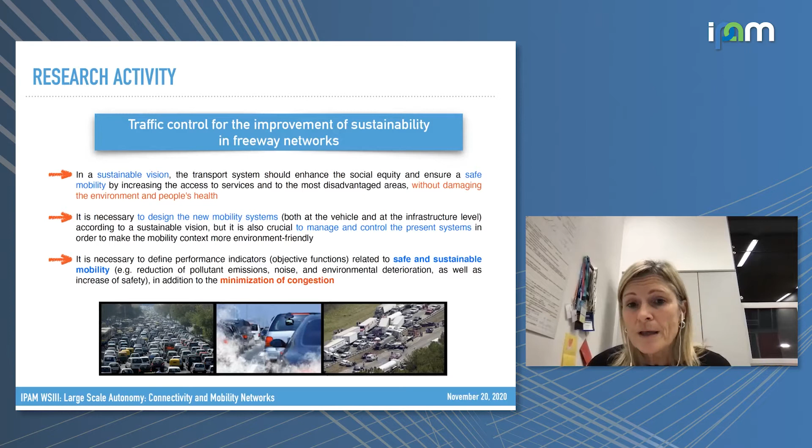First of all, we have been working a lot about freeway networks, so we are dealing with road transportation and freeways. The main objective of our research activity has been for long the possibility of improving sustainability. We would like to tackle traffic control in a sustainable vision, in the sense that we do not only want to reduce congestion, which is a typical objective function in working with freeway traffic, but we also want to take care of other performance indicators related to safe and sustainable mobility.

We have worked a lot defining and using performance indicators such as pollutant emissions, noise reduction, environmental impact, as well as safety, always together with the minimization of congestion phenomena. The main ingredients for a freeway traffic control scheme are here presented. Of course, we are dealing with the freeway network, which is definitely a large-scale process with intrinsically nonlinear dynamics, so it's a nice test field for modeling and control techniques because it's a real complex process.

In this field, we can identify several control actions typically used either on the mainstream, as variable speed limitations, lane control, or route guidance, or at the on-ramp, like the well-known ramp metering approach, which is very widespread, and I've seen a lot of work by the scientific community in the last decades.

Dealing with the control objectives we can define: something related to congestion, the possibility of minimizing the total time spent by drivers in the system, together with, in our vision, the total emissions for pollutants in the system, or the total expected number of crashes in the system, again to deal with safety, or other control objectives related to fuel consumption or noise reduction, in the sense that we would like to improve the overall sustainability of mobility on freeway networks.

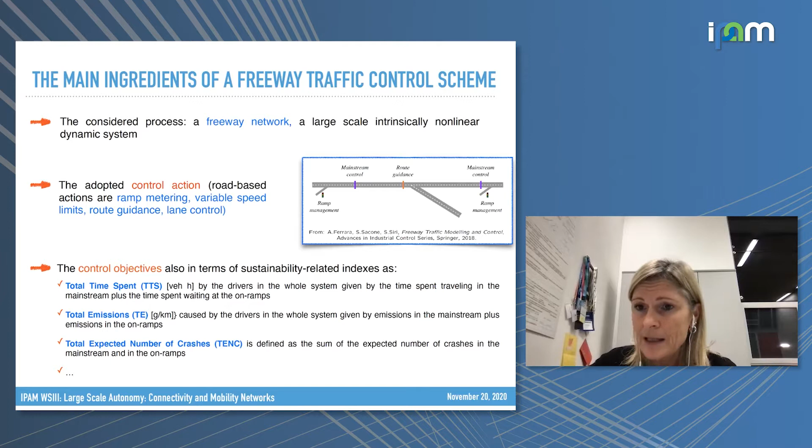Further on, what do we need to face this problem? We need suitable models, and we need not only traffic flow models, but also emission models and relations that let us associate several sustainability indexes with traffic conditions, as we did for instance for safety. We succeeded in associating the expected number of crashes in a freeway system with the traffic densities, and several other models that can be useful in this sense.

Further on, we have to define the structure of the control scheme that we want to adopt. Typically we have two extreme cases: local control, in which, dealing with feedback control, we define a control algorithm based on local measurements only, or at the opposite, a coordinated control in which we assume to have a traffic controller knowing all the state measurements of the system of the network and designing the control action depending on state measurements on the whole system.

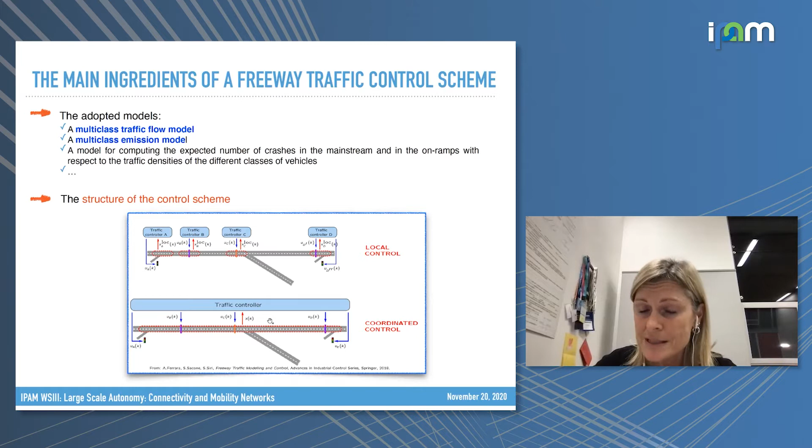Finally, we may use different control methodologies, starting from very simple feedback control laws and going on with optimal control, model predictive control, decentralized control, and so on and so forth, as we can easily find in the very wide literature that is available for freeway traffic control.

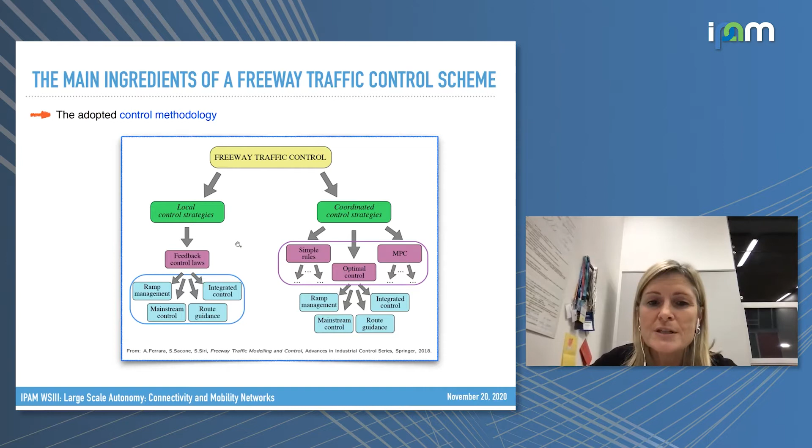We tried several things in this field: several modeling approaches, several control schemes, and several control methodologies. I've just listed some here, but I do not want to make a list of references, neither ours nor of existing researchers, because they are a very long list actually. I'm more than happy to share if somebody is interested, just putting attention on some keywords that we are interested in.

Event-triggered control: we tried to solve the control problem by defining some event-triggered logic, in the sense that we do not keep the control action unvaried, but we change it depending on the occurrence of specific events in the system. We adopted both a centralized and decentralized scheme, approximately equivalent to what I mentioned as coordinated or local control, not exactly in that way, but anyway with this in mind. We worked a lot with model predictive control.

Model predictive control, of course, is a very powerful technique for solving optimal control problems in applicative fields. I was looking back at the literature, and I found some very early approaches that we tried to work on approximately 20 years ago. I've reported those here, not exactly because they are so interesting, but because it has been curious for me.

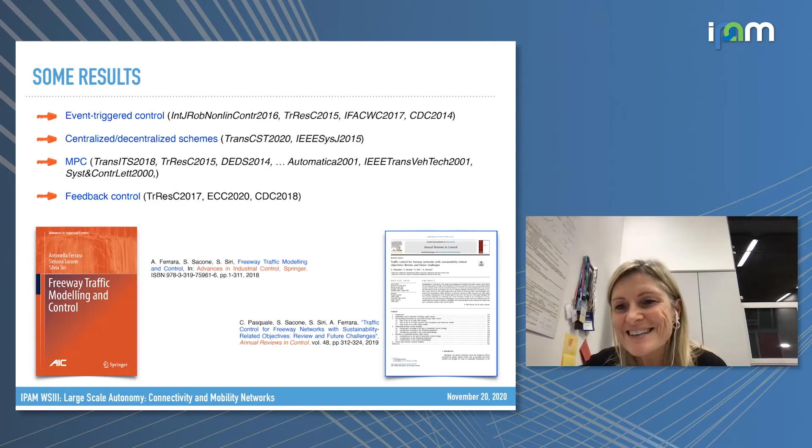This is something reported in some works that we did, and this is just the background to understand how we started working about platoon control. We tried to exploit some lessons that we learned. So what did we learn?

First point, this is very interesting in my opinion. As I told, we worked a lot about sustainability issues, about sustainability indexes. It is very clear, after some time, that congestion reduction and the optimization of the majority of sustainability-related cost functions are equivalent problems. So if you keep a low congestion in your network, you also improve all those sustainability-related objectives. So it's worth considering how we can manage and prevent congestion, because this goes in the same direction as having a safer and more sustainable mobility on the system.

The main point that can be identified in this sense is that the main conflicting issue in freeway networks actually refers to what happens in the mainstream and what happens at the on-ramps. This is the only conflicting issue, and this is the only thing that makes the difference when you deal with different control functions. For instance, if you want to minimize pollutant emissions for trucks, it's worth making them enter the freeway instead of remaining at the on-ramps, because there they have higher pollutant emissions. And this is a case where ramp metering actually differs depending on whether you only take care of congestion or you also take care of emissions.

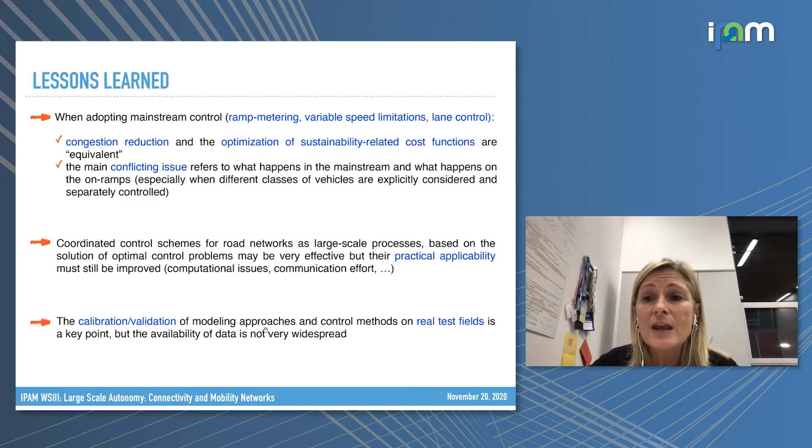Of course, we do now can use new sources of data. Vehicles will be sources of data, and also a lot of different methods can be used, just exploiting the connections, that is the connectivity of vehicles. And so we do hope to see the amount of data increase in the next time.

Okay, with this in mind, how did we face platoon control? That is the topic of this presentation. Of course, now we have to change the paradigm. We have to move from road-based control schemes, as the ones that we treated up to now, to vehicle-based control ones. So we have to put our attention on the way in which vehicles, and especially automated and connected vehicles, can be included in a freeway traffic control scheme in which they can be both sensors and actuators.

So they can actuate control actions, specifically, I believe, speed limitations, but they also can be sensors, so they can be sources of information for the whole control scheme.

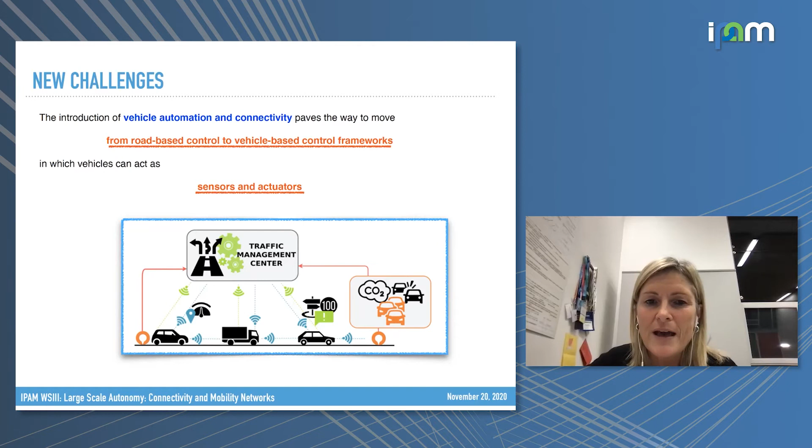Okay, I was mentioning, how did we face this problem? This time, we decided to start in a different way with respect to the past, and so we decided to start with very simple control schemes. We have to understand a little bit the features, the main characteristics of the process that we have to consider. So we started with very simple approaches.

We imagined to have a network, of course, as usual, represented by links, origin links, and nodes. And in this network, we suppose to have a certain number of platoons of trucks that move along the network. We now imagine that these platoons have already been decided, so we know their paths and we know the time in which they would like to enter the network. We do not decide about this.

And also we do not decide about the control action that is necessary to keep the platoon moving together. We just would like to understand whether platoons can be used to improve the traffic conditions by exploiting their speed as a speed limitation. And this is what we are trying to do in this approach.

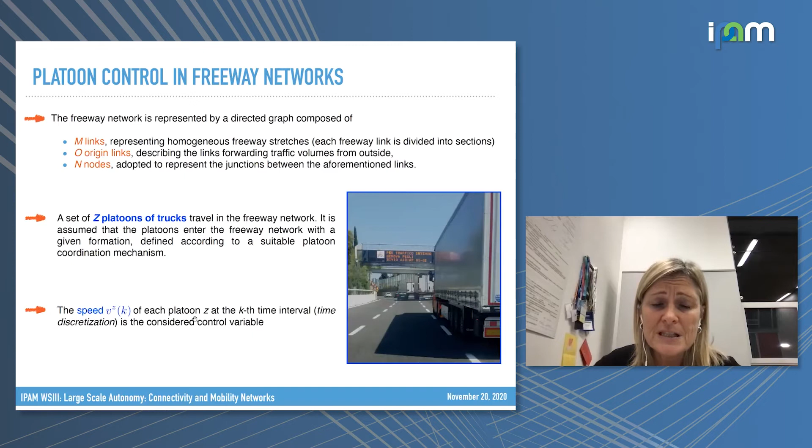So the control action that we are considering here is just the speed of each platoon. This speed is our control variable, of course, and it is determined in a very simple control law, which is a PI type feedback control law, in which we use a discretized version of the controller, and we use measurements about the traffic density that are necessary to define the control error inside the feedback control law.

This approach is very simple. It's a very well-known control structure. We have introduced some features in this control law.

Specifically, the first one is that when we define the measurement that we need to use the control error, this measurement is not just one local measurement downstream the section in which we are, but it is computed as an average density. So we try to extend a little bit the information that is used inside the local controller, not using just one density in one specific location, but averaging the densities that are downstream the location in which the platoon is. This could be a starting point for making the controller a little bit aware of traffic conditions along the road.

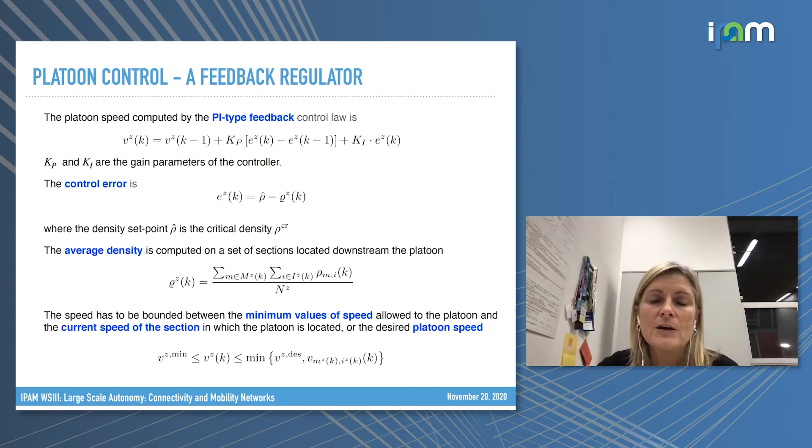We tried two directions in this sense. The first one goes through the definition of a new model which incorporates the presence of platoons inside a macroscopic framework. So this is what we have called the micro-macro model. It is because the model includes two levels.

The first one is a classical destination-oriented network model. It is a macroscopic model, the well-known METANET model, which is not that good for proving theoretical properties, but shows good prediction capabilities, so we chose it for this reason. And inside this macroscopic model, we want to include a microscopic level, just dealing with the movements of platoons, taking care of their presence inside the network, their position, and their speed.

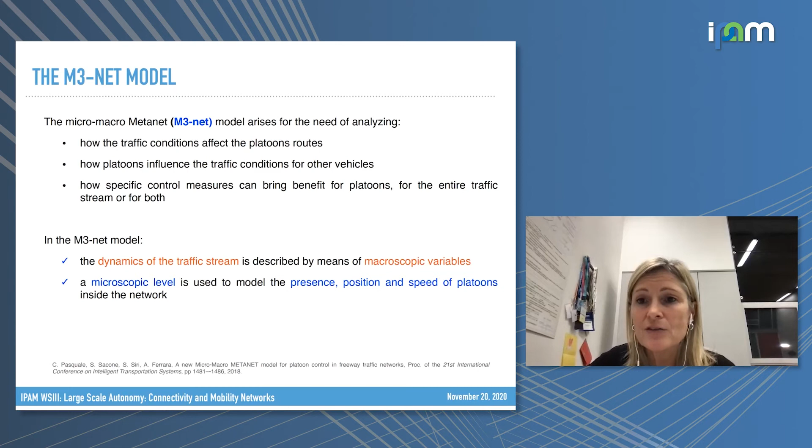The objective would be that of understanding the interactions also between these two modeling levels. I won't go into details about the macroscopic level. It is METANET, it is very well known. We very well know its advantages and also its limitations.

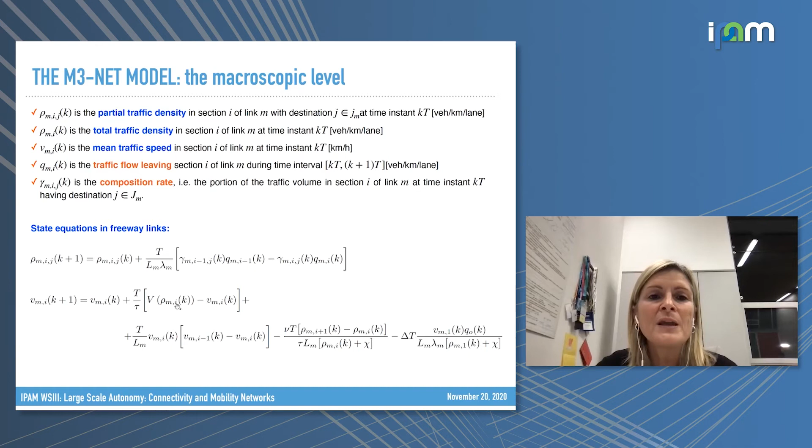It is based on state equations that take care of the dynamics of the partial traffic densities, traffic densities, and traffic mean speeds. Also we used in the model specific dynamic equations for the queue length on the on-ramps, in case we want to use ramp metering, this is useful to include. And also the METANET model embeds a certain set of flow balance equations in nodes, doing a correct balance of destination-oriented traffic volumes in nodes. Anyway, the model is very well established, so I won't go into details about it.

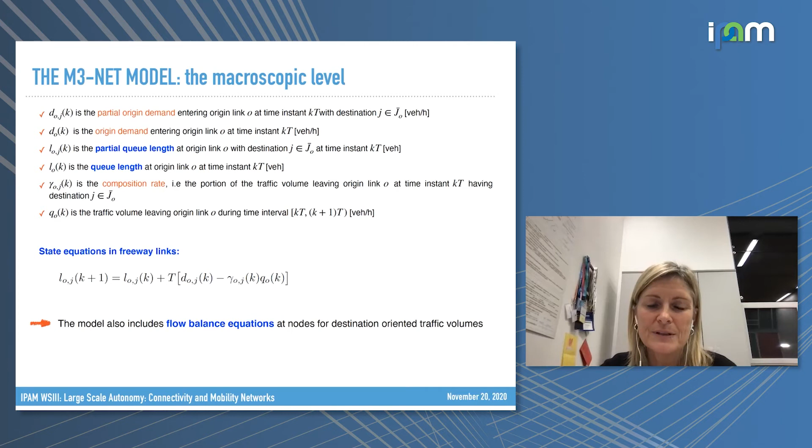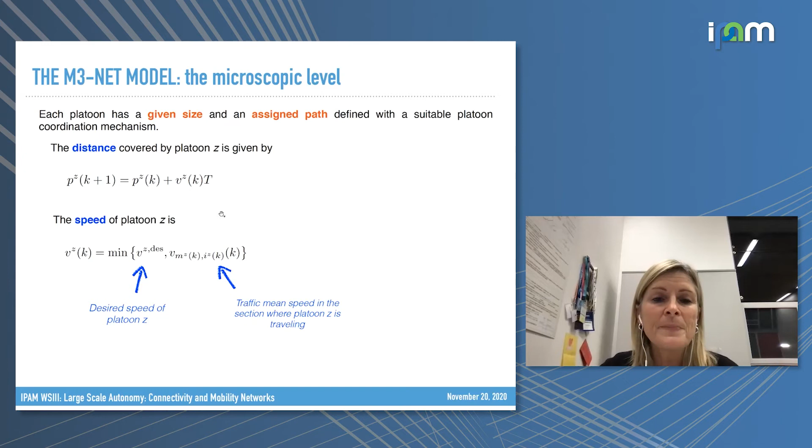What about the microscopic level? We have assumed that each platoon has a given size and an assigned path. We won't decide about that. We define instead the state equation for the distance covered by the platoon. This is the cumulative distance covered by the platoon from its appearance in the network. And the speed of the platoon is defined with the minimum that we have already discussed some slides ago.

Further on, the microscopic level also takes care of the possibility that platoons have to enter the network. So we have tried to take care of the fact that in highly congested situations, it could happen that platoons do not succeed even in entering the network. And so we have defined some conditions to also analyze this case.

I do not want to give too much details, these are very simple relations actually. And we have also included a dynamic evolution of buffers for platoons, just to take care of the possibility that platoons have to wait on the on-ramp links before entering the freeway.

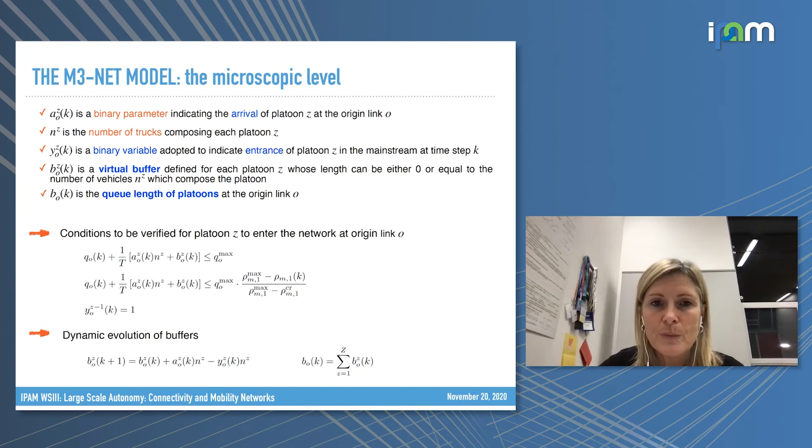With all these relations, of course, we have defined the two modeling levels. Still, we have to model some interactions. We've done this by considering not only, let's say, two different kinds of traffic densities inside each section, the one related to normal vehicles, and the one related to the occupancy of platoons, in case they are present in the section.

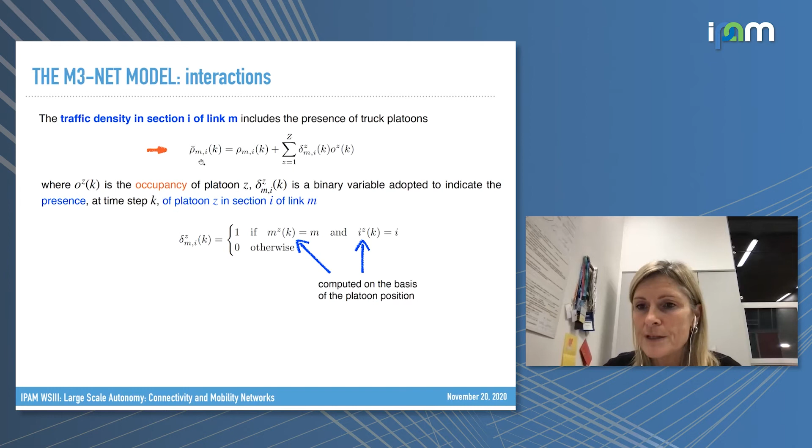This new traffic density is used, of course, to model the real occupancy of each section, but also it is used as the argument of the dynamic equations related to the traffic mean speeds. Anytime we have to include the traffic density inside the speed equations, we use this global traffic density, also including the possible presence of platoons. This means that we are including some interaction of platoons with the normal traffic flow, in the sense that this density influences the speeds of the whole traffic flow.

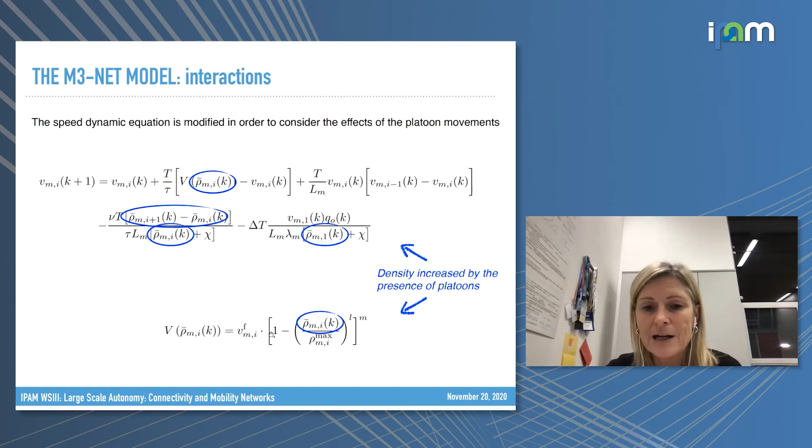In this dynamic equation of mean speeds, we have the presence of the traffic fundamental diagram. In this model, we used a very classical form of the traffic fundamental diagram. We are working on this. Of course, we believe that we have to find different forms, different structures for the steady state speed density relationship.

These structures should consider two different aspects, in my opinion. One is the fact that we are dealing with mixed traffic. We have to understand how the presence of automatic vehicles and platoons, in this case, specifically influence the steady state relationship of normal traffic.

But also in this specific case in which we want to do speed control, we have to take care of the fact that the traffic fundamental diagram for systems in which speed limitations are adopted is not exactly standardized. So there are several forms for the traffic fundamental diagrams, or better, the steady state speed density relationships with speed limitations. But I believe we do not have yet a complete and well-recognized form for this relationship.

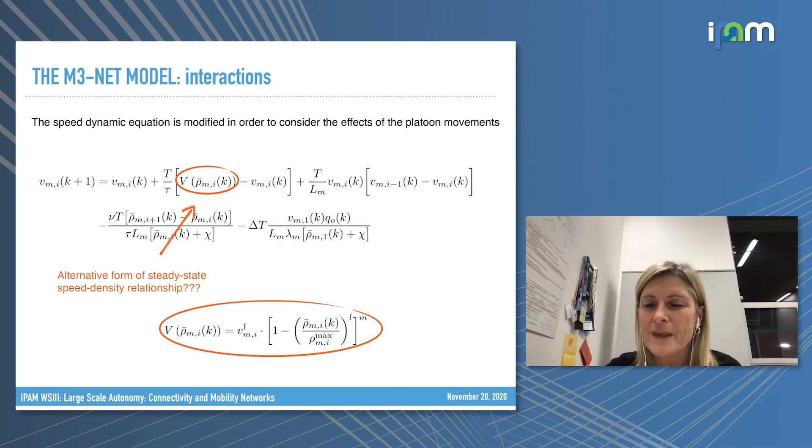We are working on this. I just listed here some works that deal with the definition of the fundamental diagram with the presence of mixed traffic flow and also with variable speed limitations. Of course, this list is not exhaustive at all. I just reported some works that we are considering, dealing with either the presence of connected vehicles or the fact that we are using speed limitations.

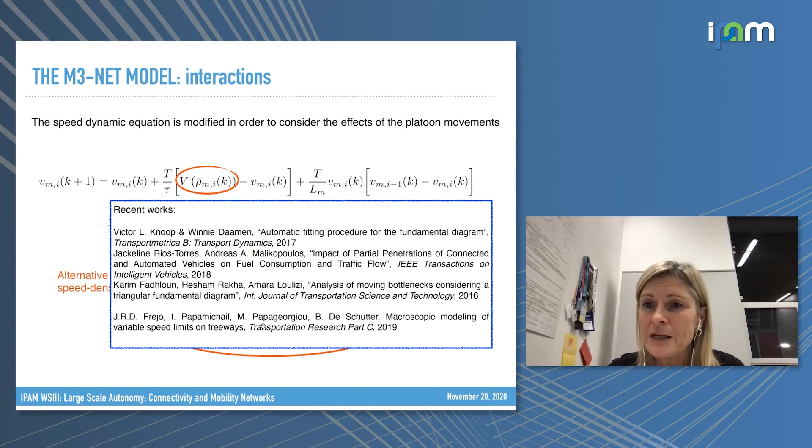These are the two aspects that are needed.

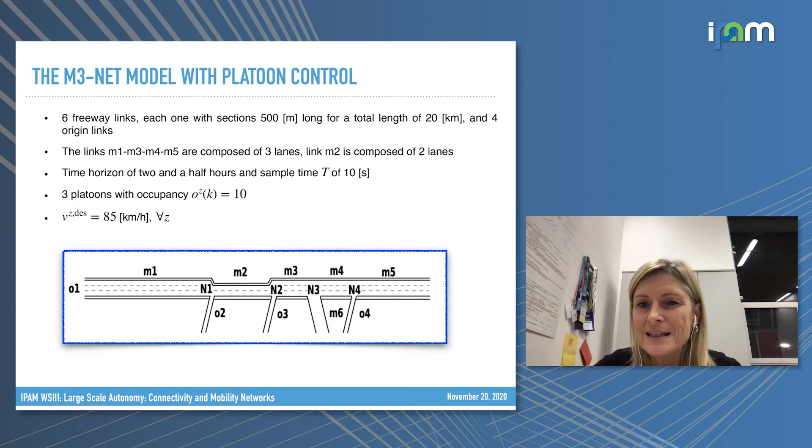Some results of this very preliminary work: we consider a freeway with 6 links, working in simulation, with several on-ramps and a time horizon of 2.5 hours. We imagine 3 platoons, each with an occupancy equal to 10 vehicles inside the freeway, with a desired speed of 85 kilometers per hour. We did simulations using the micro-macro model for testing the effectiveness of the control action.

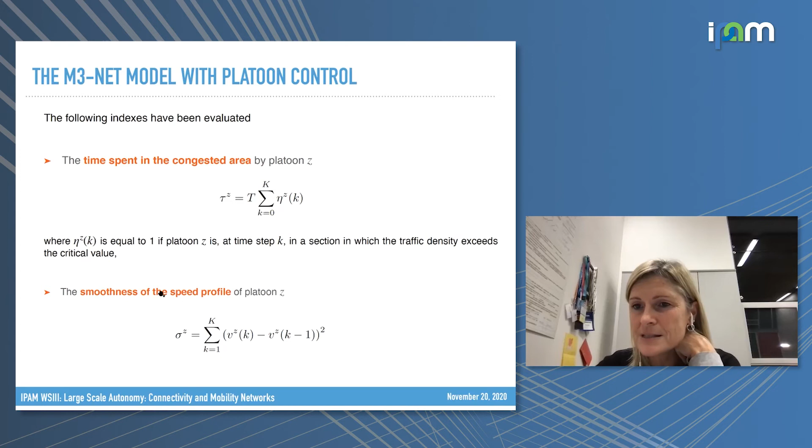To have a quantitative evaluation of the effectiveness of the control, not only for normal traffic but also for the platoons, we defined two indexes. The first computes the time spent in the congested area by each platoon - the sum of time intervals during which the platoon is in a congested section. The second index is related to the smoothness of the speed profile of the platoon. We know that trucks need to move with smooth speed profiles, so we wanted to compute this index to account for that aspect.

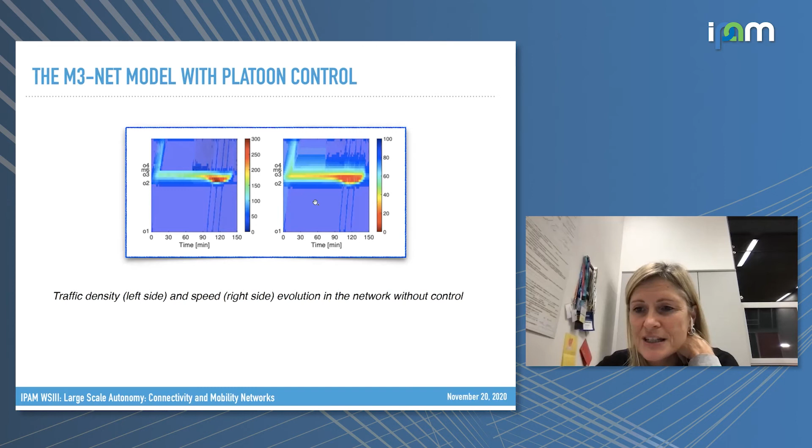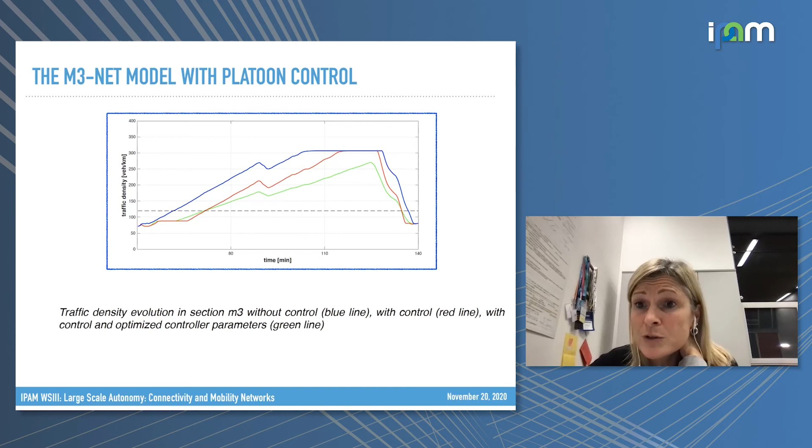This is what can be analyzed, and we can do much more than this. This is referred to what happens for normal traffic - normal traffic is interested in reduction of congestion, and something can be done with this approach. But what about platoons? We would also like to understand what happens to platoons and if we are worsening their situation.

We reported here the profile of the platoon speed for 2 of them. Again the blue line is without control and the red line is the controlled case. We have seen that congestion is still there, so in both cases the platoons have to slow down a lot and travel along congested sections with very low speeds. But with the control approach, there's a smoother decrease in the speed profile of each platoon up to a certain point - the profile speed starts decreasing earlier compared to the case without control, and this is something good for platoons.

Then, since congestion has been a little reduced, they travel with the minimum speed for a shorter time period, and then go back to normal conditions, similarly to how they would have without control. This happens in a similar way for all the platoons.

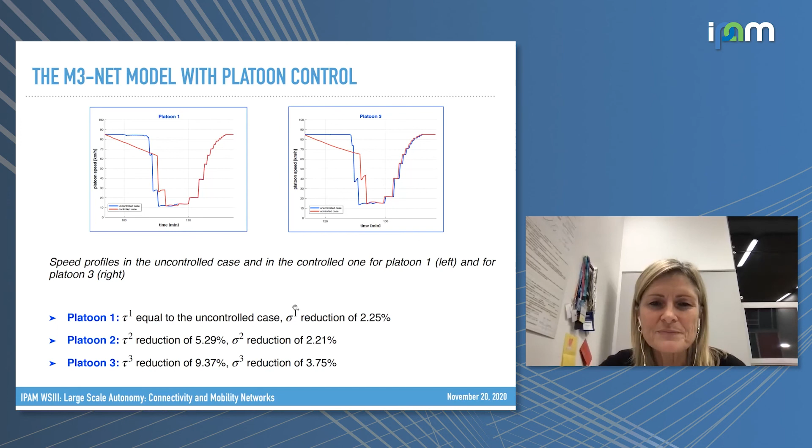We computed the indexes mentioned before, and we can see that the presence of platoons in congested areas is reduced - not by much, but still reduced - together with the index that counted abrupt variations of platoon speeds. This was clear also in the pictures. These are slight variations, but it's still promising to try to improve this control scheme. This is what we are working on now - calibrating the model through AIMSUN, a microscopic simulation tool.

This is the second way in which we can test the control action, doing simulation with AIMSUN. We are working on that, but we have not yet succeeded in suitably modeling platoons inside AIMSUN. We have not completely understood how this can be done in an effective way. We have some application programming interface and we are trying to do something, but we have not yet reached a good result.

As I told, we are analyzing the fundamental diagram in such a way that we can use a more affordable version of it, or even more realistic. And also we have tried to design more sophisticated control architectures. This one was really very simple.

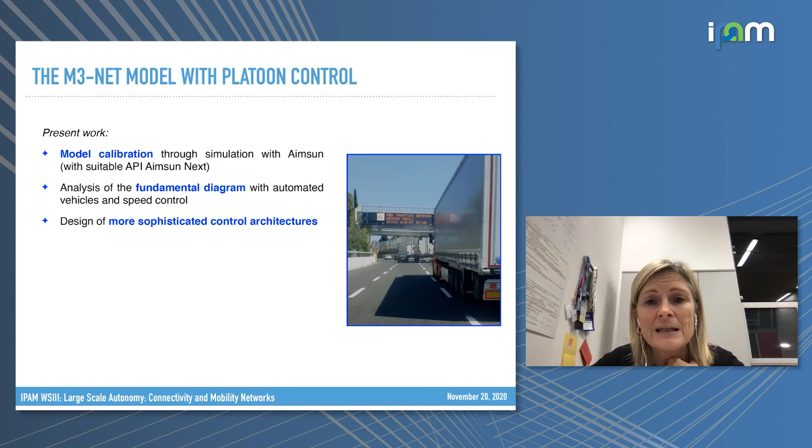To do this, I present very preliminary results on which we are working right now. We tried to use a control architecture that we have already defined for general multi-class traffic networks.

This control architecture is anyway based on local controllers, so we are not going in the direction of defining complex control problems. We will try, of course, but up to now we are still dealing with local controllers of the same type as before, so PI type feedback regulators. But we wanted to include them in a certain hierarchical architecture with a more sophisticated approach in which the control law parameters are defined not only by a local algorithm, but with some more information.

This architecture has been defined both in a centralized version and in a decentralized one. In the centralized approach, we imagine having a supervisor which knows all the system state, and being equipped with some predicting capabilities, decides whether it is necessary to change the control law parameters, and it may also decide whether it is worth controlling a certain portion of the network or not.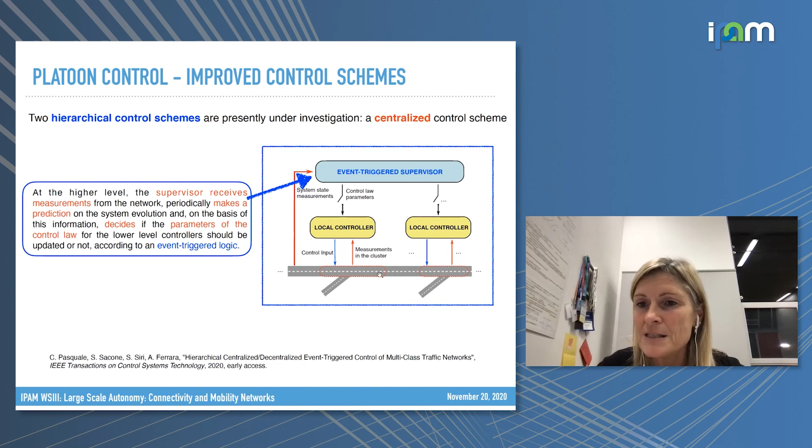Then we again have a low level made up of local controllers. Again, they use measurements not only at one location, but along a certain number of sections that we have called the cluster. It is important to say that the event-triggered supervisor in our idea could also be used to define the dimension, the size of these clusters, even dynamically with respect to traffic conditions. The low level, of course, is made up of local controllers as before. This is what refers to the centralized version of this scheme.

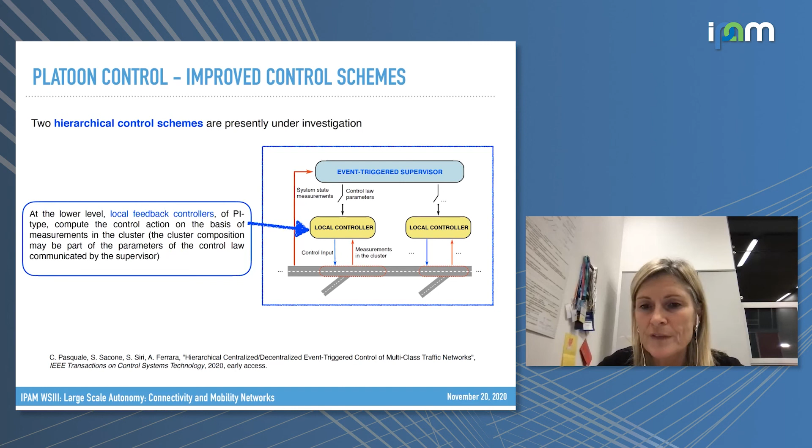We also have in mind a decentralized scheme in which we do not make use of the supervisor. We only have local control algorithms, but again these are equipped with some predicting capabilities. So they do not only measure along the cluster, but they also do some reasoning about what is going to happen to this cluster in the near future.

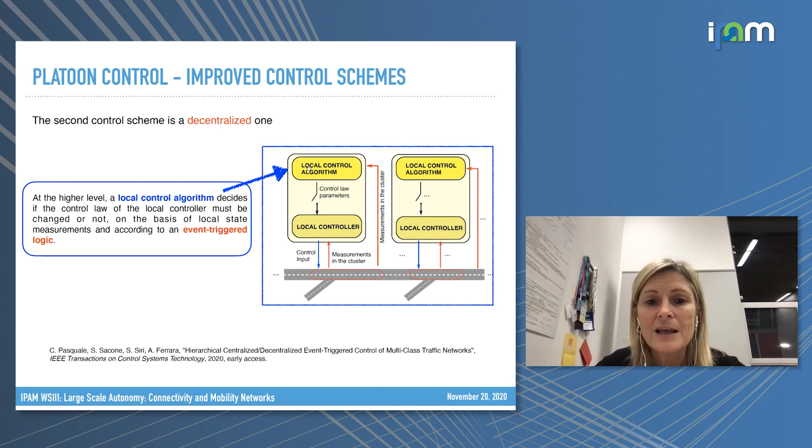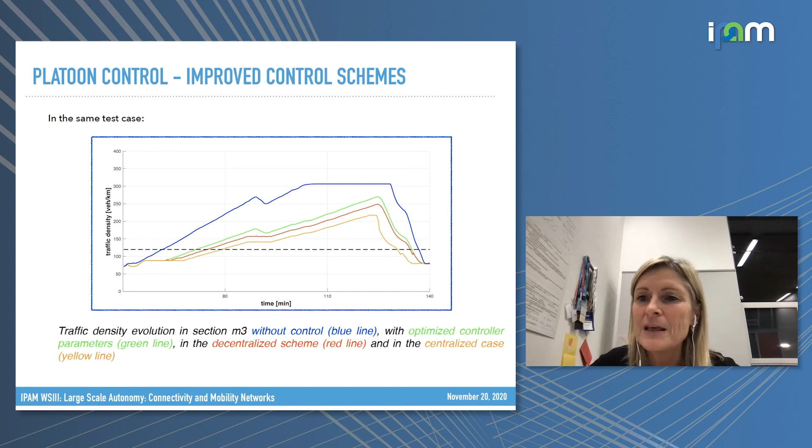Anyway, it seems promising to go in this direction and see whether these control architectures can be useful for platoon control along freeways. I can come to conclusions. I hope to be on time. I believe that...

The introduction of automated and connected vehicles, as everybody knows, is a very nice opportunity to revise the control schemes that we have worked on up to now. A lot of attention is devoted now to two main aspects: the first is evaluating system performance in mixed traffic, so we still have to quantify what happens in the system in these newly designed conditions. And also now we have the possibility of defining new modeling and control methods and schemes on a vehicle-based control framework. So I believe we are now in a moment of lots of opportunities.

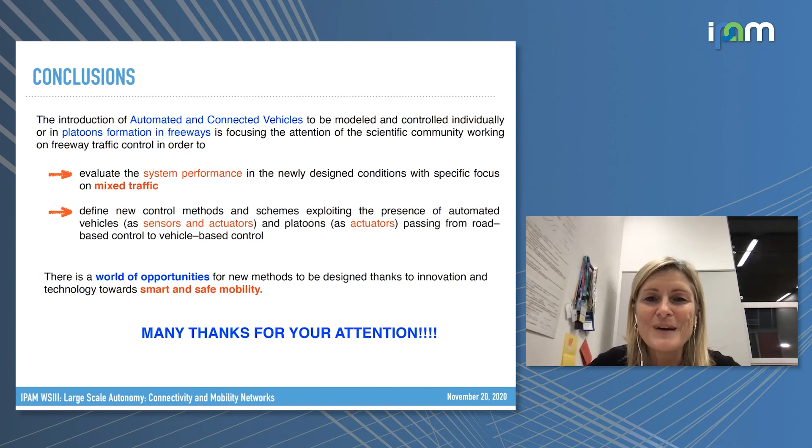Still, we have to remember what we have learned in the past. But anyway, we can move to a smarter and safer mobility, I believe, also exploiting this mobility revolution devoted to automated and connected vehicles. That's all from my side. Thank you.